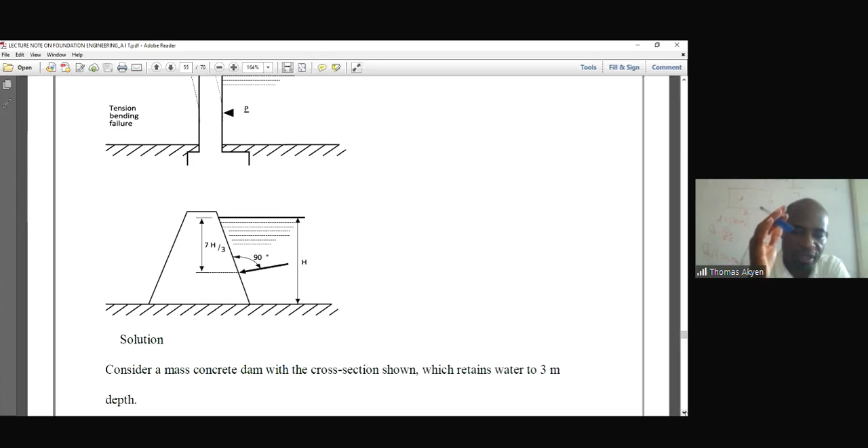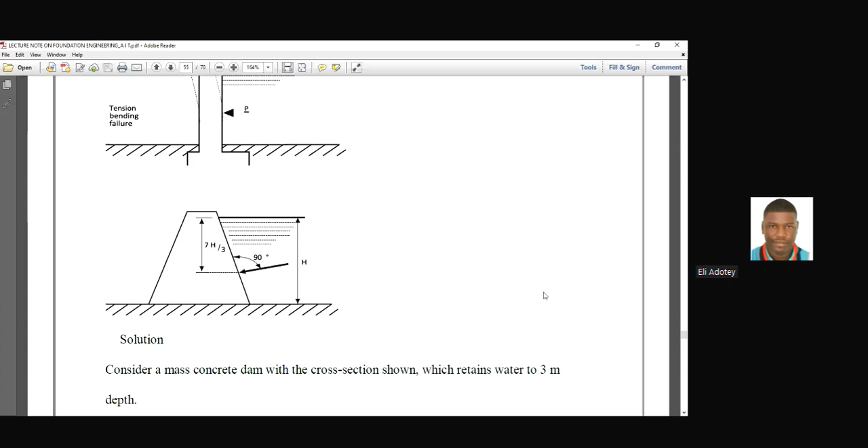A quick question. When is a structure considered as a gravity wall or a retaining wall? A retaining wall is a wall built to resist soil or water.

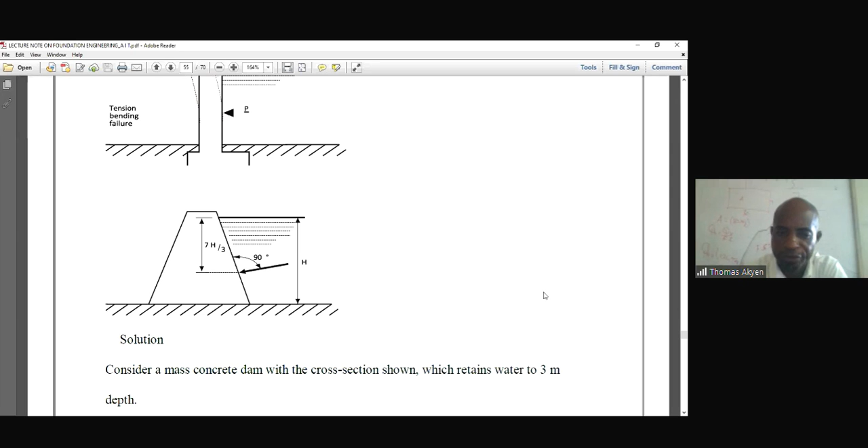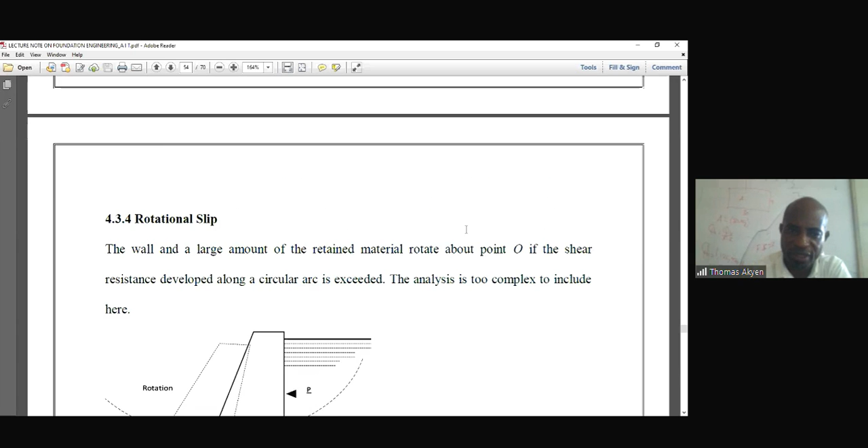A strong wall built to retain soil pressure, or earth pressure. A retaining wall is around a structure whose primary purpose is to provide lateral support for the soil or rock. If you go to places, they are firm walls, retaining walls that resist the pressure from the soil or rock. It is like a very firm wall that has some kind of resistance to a force.

Have you been to the Aburi Gardens, the Aburi regions there? You see that when we're climbing the hill, we have walls that have been built along both sides of the street. Most of these walls are retaining walls, built to withstand the forces of the rocks that are rolling from the top.

When rocks are on a hilly area and there is movement in the soil or evolution of the soil, the rocks can separate apart and begin to fall. When such rocks are beginning to fall, these retaining walls are there to resist it from falling.

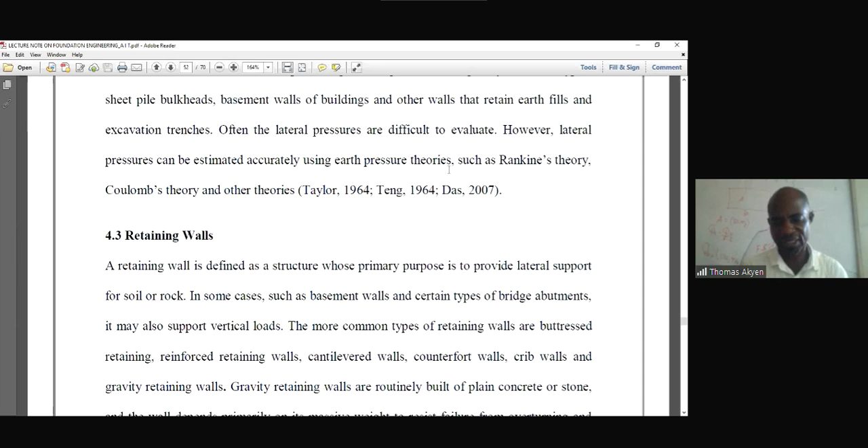Then the same applies to the soil. In some places where we build, we build a retaining wall as a barrier from the soil being collapsed onto a region. We can build a wall over there to block the soil, so anytime the soil collapses, the wall is there to resist the forces or the impact from the soil.

This wall actually built here is a wall that has been designed to carry a certain strength, and it's a reinforced wall. It carries a lot of reinforcement. It's not just an ordinary wall. It carries a lot of reinforcement bars that have been designed.

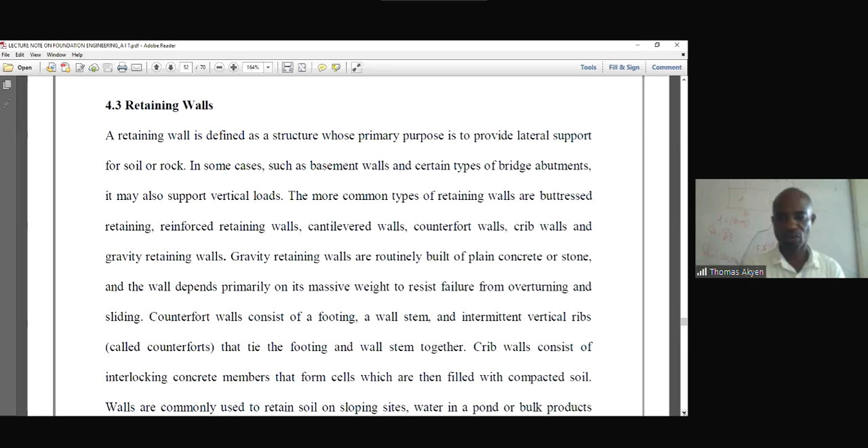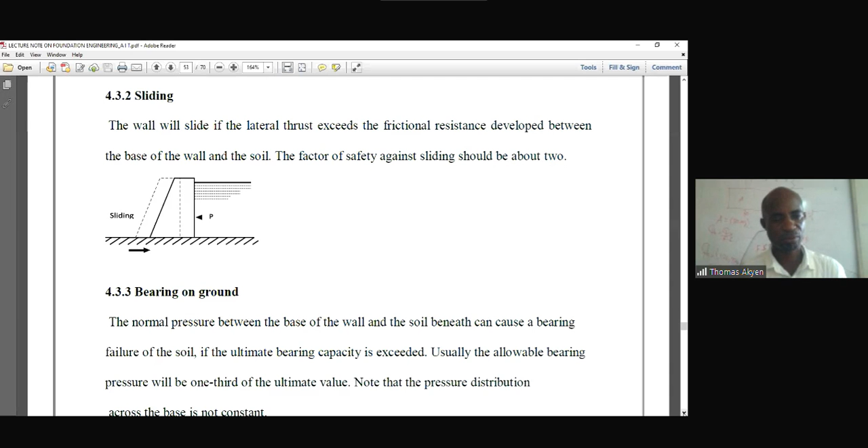And say, walls that are built on dams, built to withstand the pressure, the gravity from the water, in such a way that they are not easily... that's why you do courses like fluid mechanics, to see.

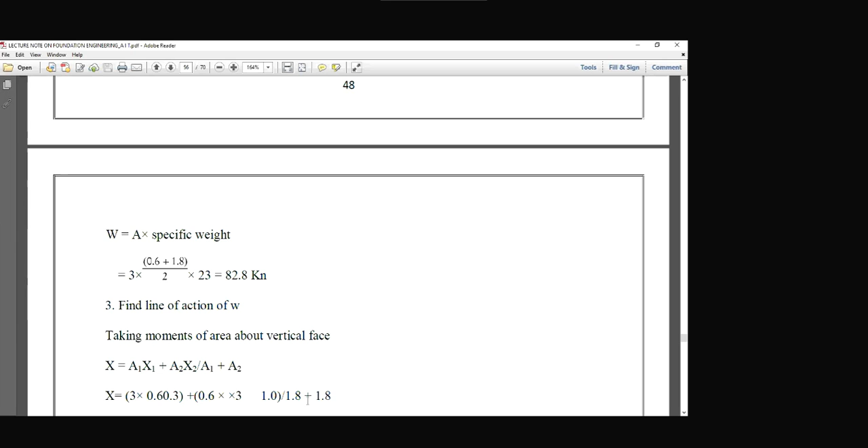Sir, please, we don't get a sound. It's recording, but we don't get your sound. We don't hear your voice. When you speak, we don't hear you. We don't get you. We can't hear you. Okay, now, I mean, my network.

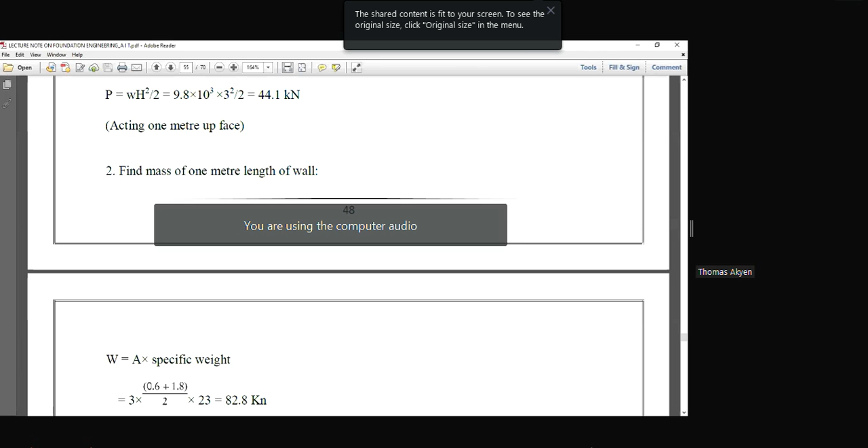It just came. No, I get it, but I have to go through so that I can. Yeah, no, but let me tell you something. One thing with university education is that sometimes you may not get everything at the lecture hall, right?

You are expected to get everything at the lecture hall, but sometimes you'll be at a loss. What you have to do is sometimes confer with your friends. One or two people in the class may understand, right? Yes, sir. Okay, yes, sir. So after lecture, you try to.

That is why we have group studies. You form group studies. Have you formed group studies? Form group studies. When we were at the university, this is what we did, from the first degree level to the master's level. We've all formed group studies for something that we don't understand. In the evening, we all meet, a group of 5 or 6, we meet and discuss it.

Sometimes in the lectures you might not even understand. Even if we have professors come to class and teach for 3 or 4 hours, you may not even understand a thing. But you get somebody in the class who understood it. When you take the lecture notes, you go to their house, sit down and concentrate one-on-one, or you have group studies.